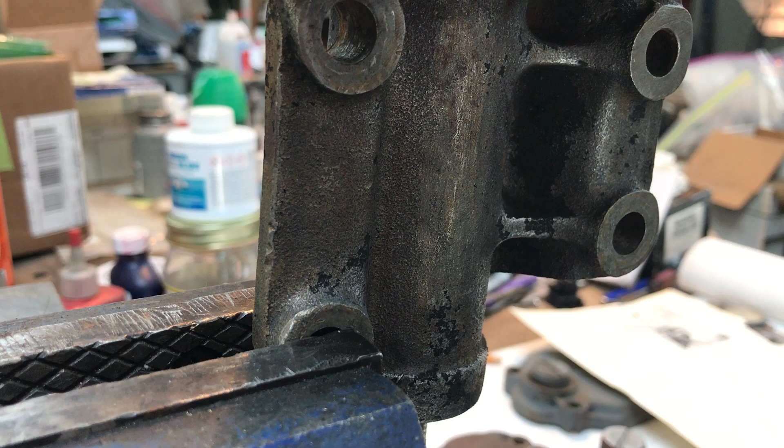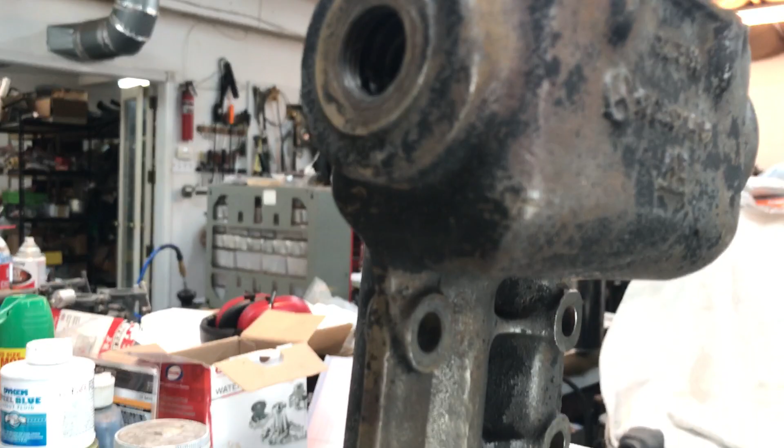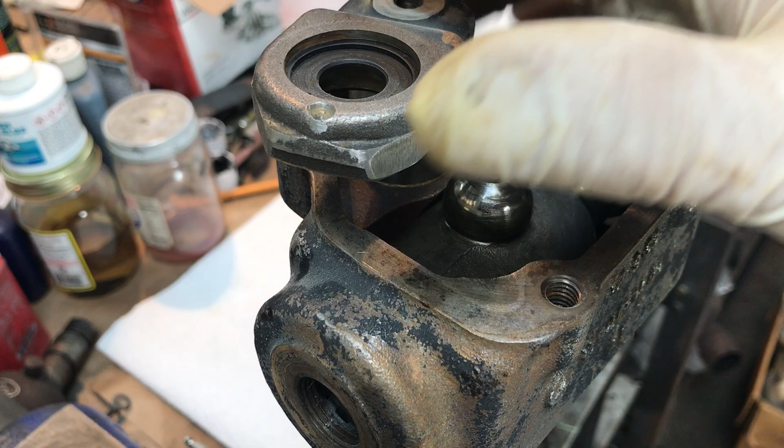Hello, Tom. You've asked me a question that I have never been asked in the 50 plus years of playing with these cars, and one that I had to research and go to the shop manual to figure out. We are dealing with the steering gearbox, and you have had a number of issues with your steering gearbox on your 190 SL, one of which was the play and slop in the steering wheel.

The other, most recent issue that you're talking about is the up and down axial play of this shaft, the shaft at the bottom of the gearbox that attaches to the pitman arm that turns the wheels, and you were getting 20 thousandths up and down movement as the wheel was turned. Not many people realize that the thickness of a typical human hair is 2 thousandths of an inch.

So you got 20 thousandths play. That means your steering gearbox shaft went up and down the thickness of 10 human hairs. That's not a great deal of movement. So let's go over what's going on inside the steering gearbox before I give you the answer.

This is the worm. It's a recirculating worm, and what this does is, here's your steering column right here, so you're turning your steering wheel back and forth. You're moving this recirculating worm back and forth on the ball bearings that are in here. And these tapered bearings here and here hold it in place. This one fell down, so we'll get it back in place real quick.

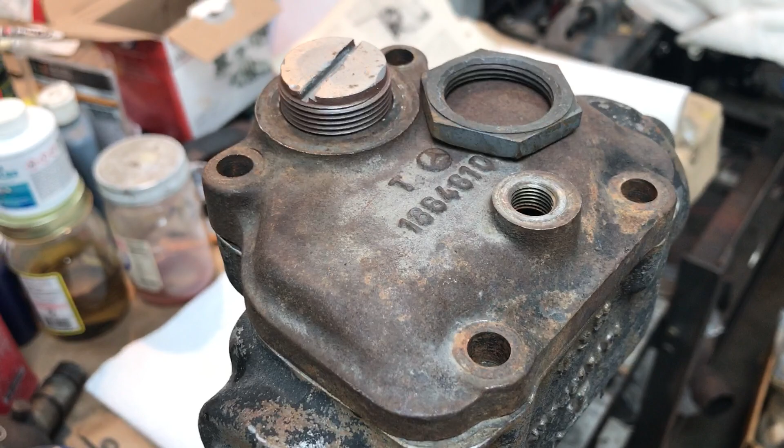And how this all assembles is you've got your top cover in place. This is all full of grease so it doesn't go anywhere. You screw this down, and then you've got your jam nut that holds it in place. All right, so now let's read the instructions as to how this is all supposed to go together. We're at this point in the shop manual.

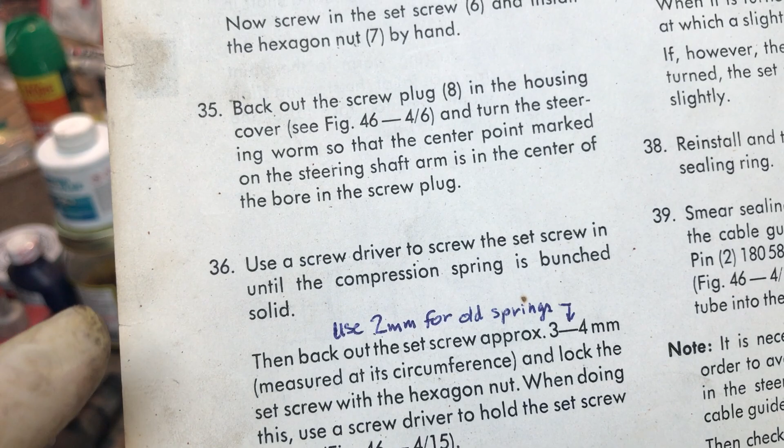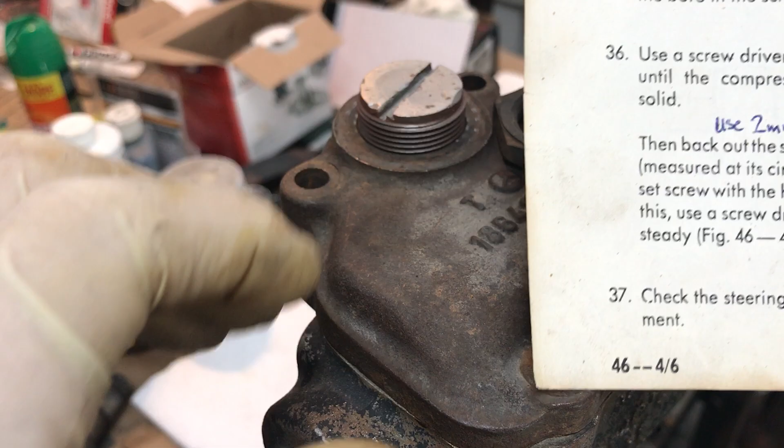Use a screwdriver to screw the set screw in until the compression spring is bunched solid. This is our compression spring, and what they're asking you to do is screw this all the way down until that spring bottoms out.

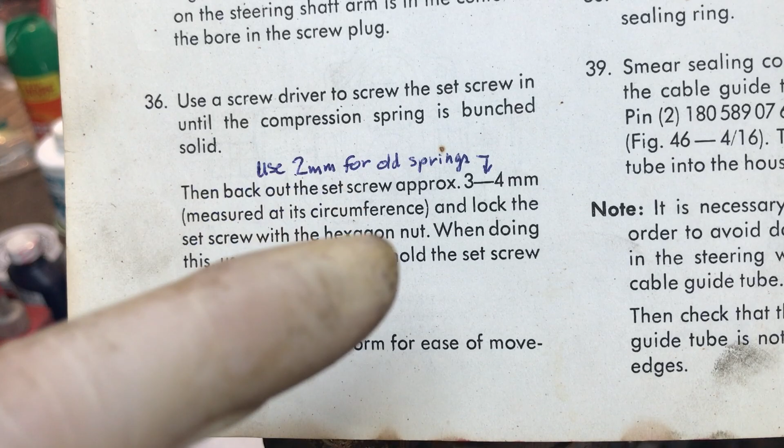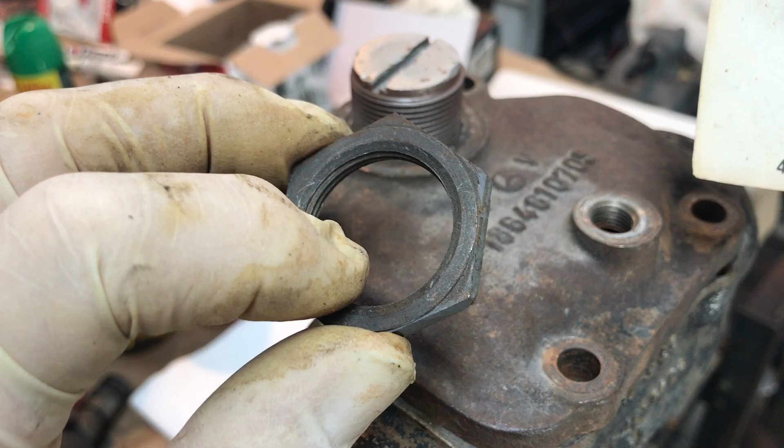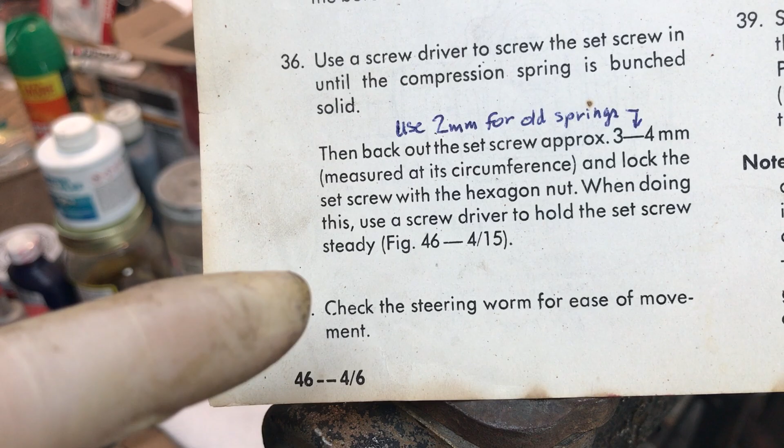At that point, then back out the screw approximately 3 to 4 millimeters measured at the circumference, and lock the set screw with the hexagonal nut. That's your hexagonal nut, notice it's got a washer-like surface on one side that snugs down. We're going to lock this down with a hex nut. When doing this, use a screwdriver to hold the set screw steady as you lock this down.

Check the steering worm for ease of movement. Now here's the critical part. Let's read this together. The steering shaft must on no account jam at the center position when it is turned.

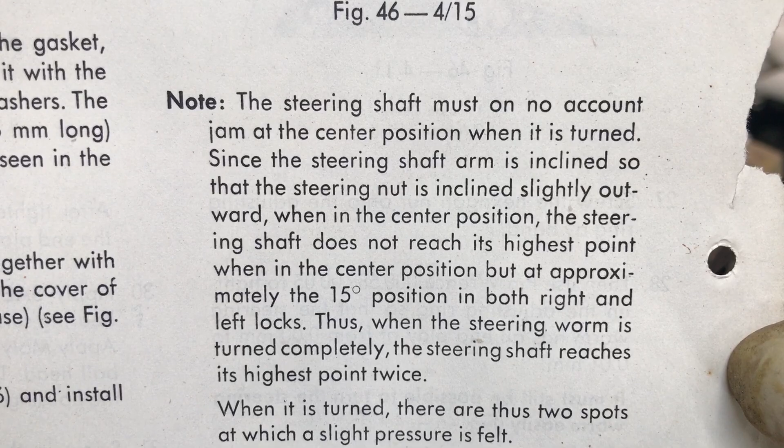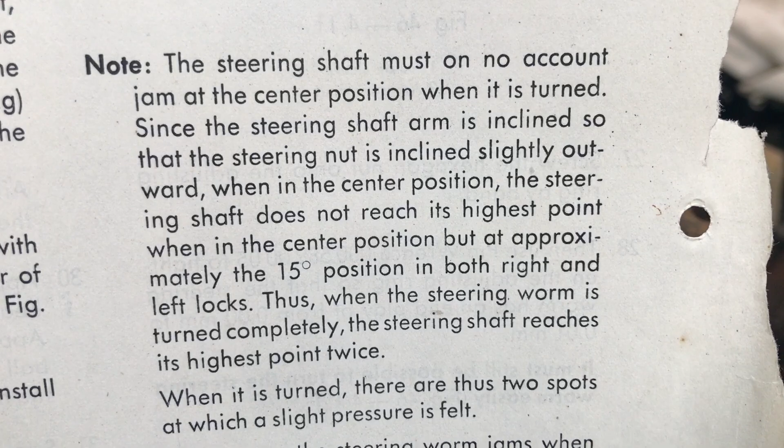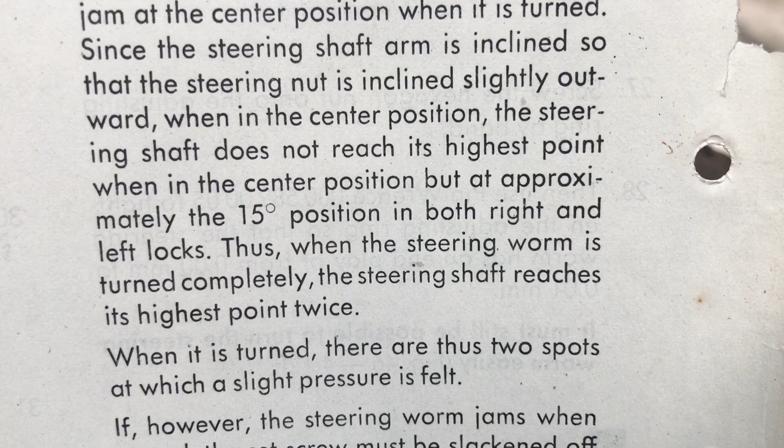That's this guy right here. This is not supposed to hang up at any point when it's turned, since the steering shaft arm is inclined so that the steering nut is inclined slightly outward. When in the center position, the steering shaft does not reach its highest point when in the center position, but at approximately the 15-degree position in both right and left locks. Thus, when the steering worm is turned completely, the steering shaft reaches its highest point twice.

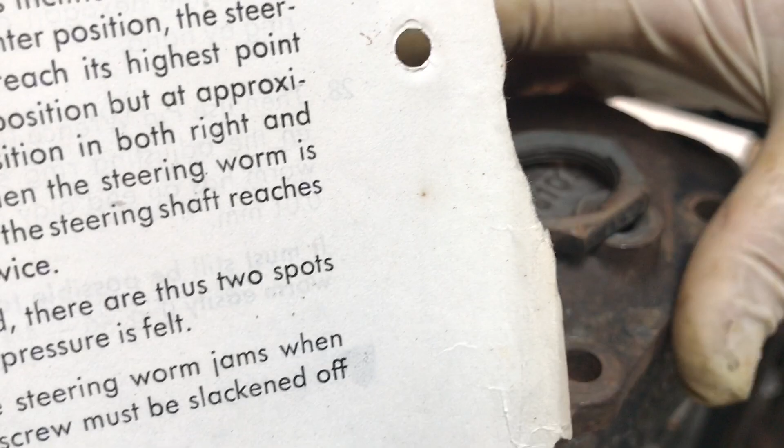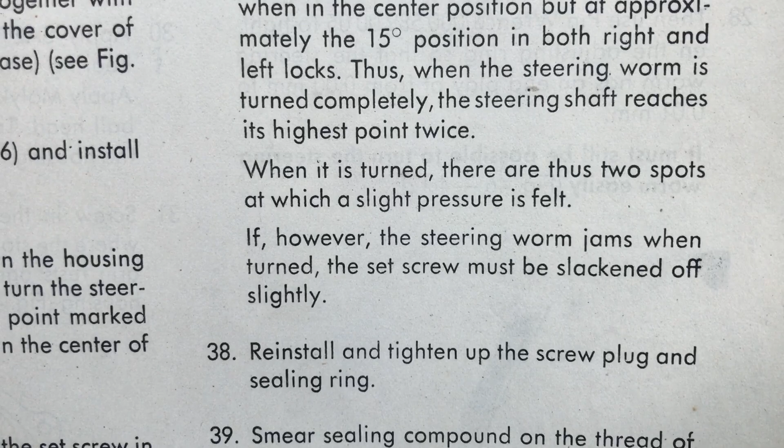That means this steering shaft right here is moving up and down as you had measured. When it is turned, there are thus two spots at which slight pressure is felt. If, however, the steering worm jams when turned, the set screw must be slackened off slightly.

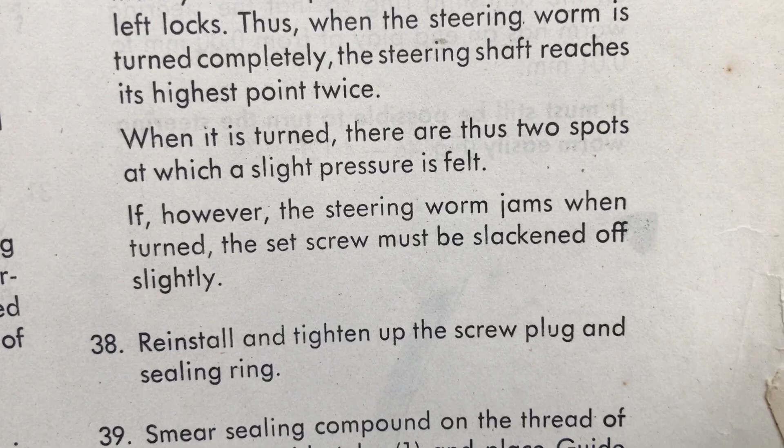So that's what happens when you don't follow the instructions and cram the set screw down too far. Because what really chaps me is people telling me that they adjusted the steering gearbox to remove the play out of the steering gearbox. Well, people, there is no such thing as removing the play out of the steering gearbox using this screw. All you're doing is applying more pressure on this spring, which applies more pressure on the shaft, which applies more pressure to your steering worm, which makes it bind up.

And so what you think is increasing, or what you think is decreasing the clearance inside the steering, is in fact just putting extra pressure on the worm and binding it up so it feels tighter. But the real important clearance that you need to worry about is the clearance between the shaft and the bronze bushings, which, like I said, is at 2/10,000ths of an inch, and you can look that up to see how small that measurement is.

And it takes a very specialized machine to achieve those clearances, which we happen to have. And that is the answer to your question. Yes, when this steering moves, this shaft will in fact move up and down.

It has to, by its very nature and by the way it's designed. If it does not move, then that means somebody has been in here, crammed this spring all the way down to where it's bottomed out and has nowhere to go, and it's just bunched up inside here, jammed up, and all you're feeling is what feels like an extra tight steering is in fact a steering that is binding.